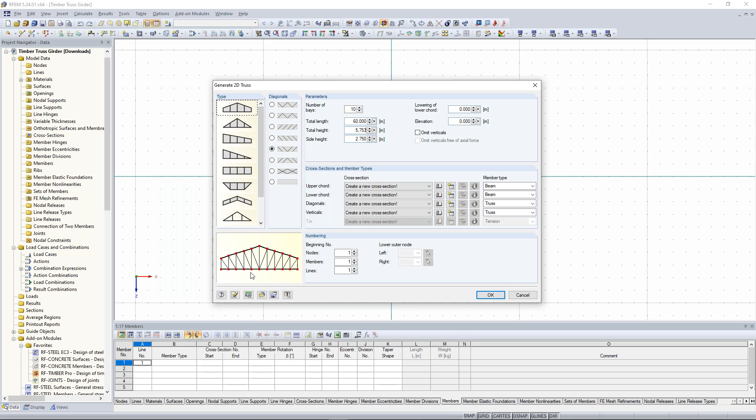My number of bays is 10, and the total length of this girder is 60 meters. The total height at the point here in the middle is 5.75 meters, and the side height, on the left or right side, is 2.75 meters.

Now I have to create new cross sections with the right material, for the upper chord, the lower chord, diagonals and verticals. For the upper chord, I don't know the right pronunciation, sorry for that, I choose a new cross section. I think the right word is chord. Yeah, I guess so. It's chord, okay, thank you.

Thank you, Ayla. So I create a new chord and choose here a rectangular chord because we want to create a timber chord. I click on that icon, and my parameters for the width and height are 220 millimeters and 560 millimeters, so 56 centimeters and 22 centimeters.

Now it's important that we choose the right material. Here you see I just have concrete and steel, but we want to have also a glue-laminated timber. So we have to create a new material, and we create this new material when we click on this material library. I choose timber here, and this mask jumps to the normal timber materials.

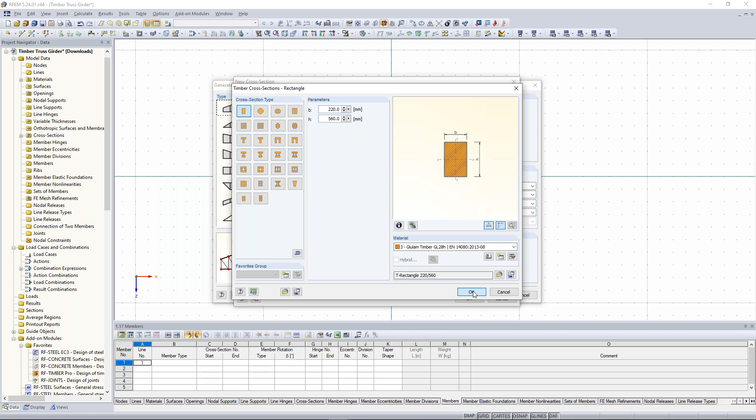Now I can copy here this cross-section description with Control key and pressed C key. Click on OK. And I create a new cross section for the diagonals.

And now I copy here this thing and choose here the right material and change here the cross section to 200 and 200. So we have a quadratical cross section here. Click on OK.

And now the same thing for the verticals. Here we have a cross section of 200 and 180. Also material glue-laminated timber.

So now on the right side, you see the different member types, beam and truss. Where is the difference? Beam can transfer all typical internal forces like bending moment, normal and shear forces, and truss is a member type that has on the end of a member hinges, and therefore you can transfer only normal and shear forces, no bending moments. So keep that in mind.

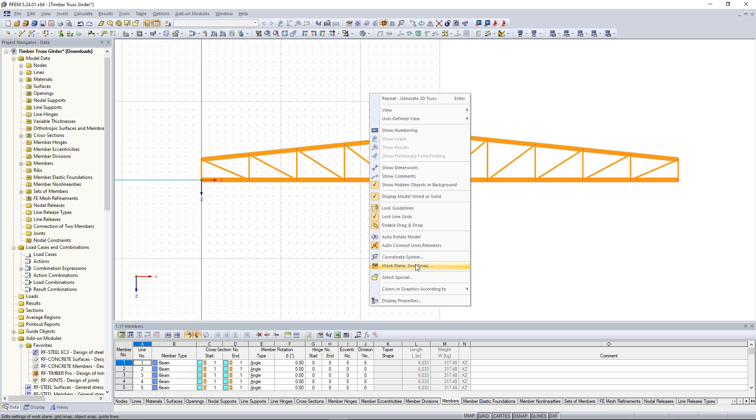So the next step is that I want to adapt my grid to the size of our model. For that I click with the right mouse click, and I can choose here on work plane grid snap. And here I have the possibility to adapt my grid according to size of model.

When I click on that, you will see that the whole grid system adapts to the whole size of my model. And this makes, in my opinion, the overview of the whole model and project a lot easier.

So the next step is that we delete here the left members and the right members, because I want to create here a support, single support. So I draw a selection window from the right to the left side, and the same thing on the right side.

And then I can click here, right click, and say delete. Now these 2 or 4 members were deleted.

And now a very important point, because I want to transfer here also some forces, that we change here these diagonals to the member type beam.

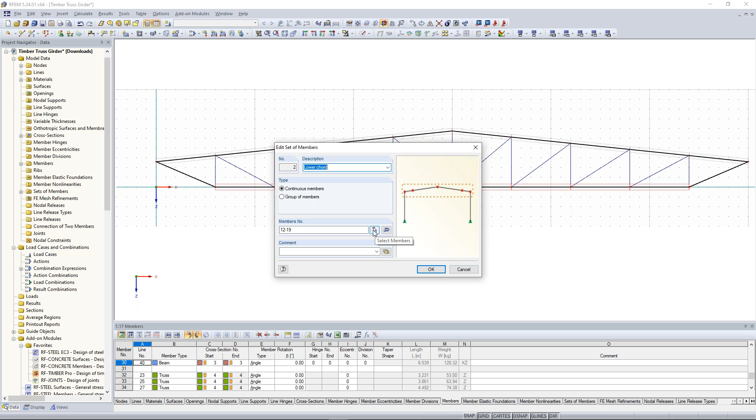For that, I click here on this icon, select members, click on that diagonals or on that members, click on OK. And you will see here this set of member.

So you see this program created automatically this set of members by generating this 2D structure. And this will help us later when we want to add some loads.

Good. The next point is that we add here some single supports. So we select here through this selection window this node, and after that we click here on the symbol bar, new nodal support, and this support should have this type hinged.

And on the right side we have another support, and this should be a support which carries only vertical forces. So I move this with this selection here on UX away, so that we just activate here the vertical forces, similar to this sliding in X direction.

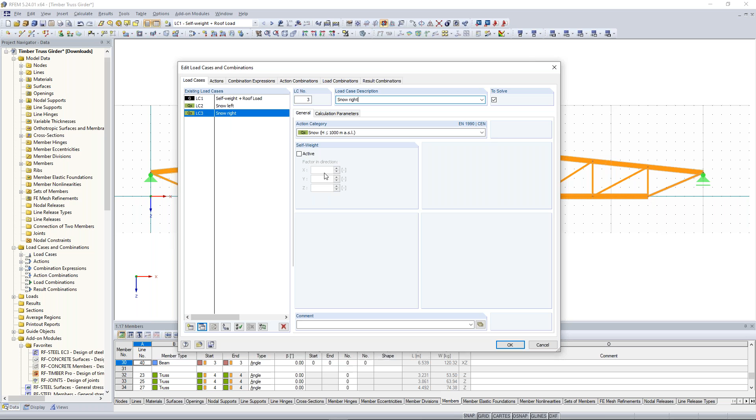And the next load case is snow. I want to consider the snow loads once on the left side and once on the right side. So for that, I click here, I enter left. Then I can easily copy this load case by clicking Copy Selected Load Case and Create New. And here I change the name from left to right. And the last load case is wind suction, because we want to consider also a suction wind load case here on this upper chord.

Important thing is here, because we activated on this basic data at first, that we want to create these load combinations automatically. So several registers open, and we have additional options to do something, like for the snow, for me it's important that the acting of the snow action is simultaneous, meaning both load cases can combine with each other, so no one excludes the other. We will see that later on the load combination. I click OK.

And now I can create here the load cases or the loads. So for that, I click on New Member Load. Now, because we have this set of members, we can refer to them. Just click on Sets of Members, and then the load parameter is 2.5 kilonewton per meter, and I relate to the true member length because we have an inclined member. So for self-weight, it's important to select this option, global related to true member length. I click OK. Now watch, I can just click on this set of members, and the whole load will be created on that upper chord. It's a really big advantage of this set of members when you do that.

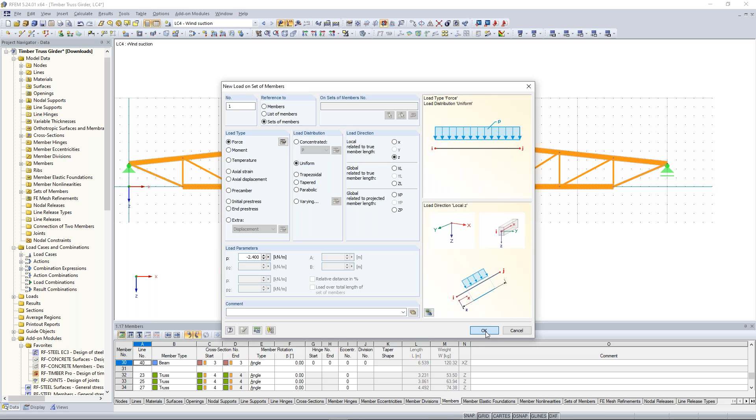Good, next load case, wind suction. So I want to create wind loads. For that, clicking again on Member Load. Again here, I refer to Sets of Members. And now important point, I want to refer to the local related member length, so to the local axis of my members. And because we have suction forces, so suction loads, I have to enter a negative load parameter: minus 2.4 kilonewton per meter. I click on that upper chord and this creation of our loads is done.

When you want to know the local axis of one of these members, no problem. Click with the right click on one of the members, say Local Axis System of Members On, and you will see the local axis coordinate system of the members. Good, I deactivate this again because I know my system.

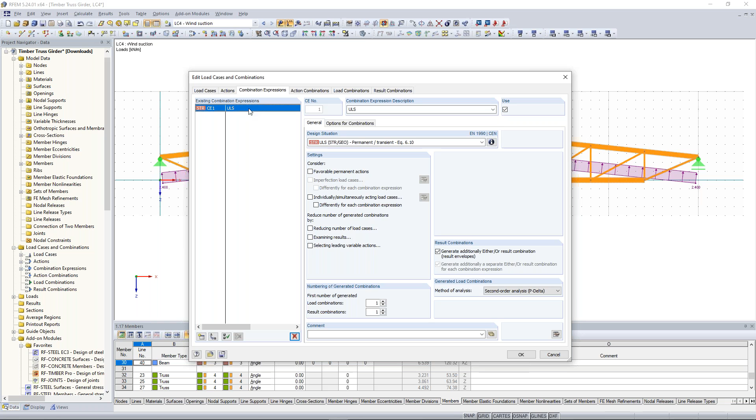And now we can calculate this. Now go to the load cases and combinations again. Click here on Load Cases and Combinations, and look for the combination expressions. Here you see the ultimate limit state and also the serviceability state. For that easy and simple design of this truss structure, I don't need these serviceability expression combinations, so I select them all by holding the Shift key and delete them. I have just interest in this ultimate limit state because in this case it's more important.

I jump to the next register, Action Combinations, and here you can see the different action combinations with the leading load case, by this combination value 1.5, and here also the other leading load case. In this case, here we have the wind load case as the leading load case.

The load combinations we can see here. I think this is pretty clear. As I said before, we have activated in the register actions both load cases of snow, and this means that they can act together.

And this is important to know, because when we activate here at the snow action alternatively, this would mean that both snow load cases would exclude each other. Good, I click on OK.

And now I can say, okay, calculate all, please. And after that, let's watch the results of this girder, this truss girder.

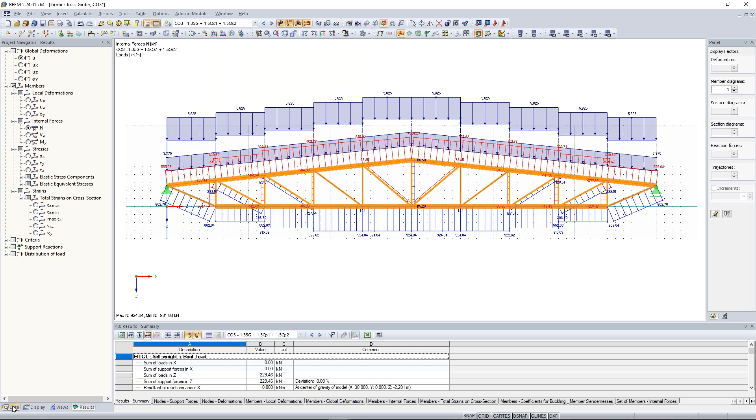Now let's come to the design of this timber structure. For that, I jump to the data navigator, and when you scroll down, you will see here our add-on modules.

These add-on modules enable you to design almost everything according to some standards. So with normal RFEM, you can calculate all structures, but if you want to design something, you have to use our add-on modules. And because we have here a timber structure, I have to use RF Timber Pro.

You will find it here, somewhere there. I can add some add-on modules as a favorite, and they will be here. And now I click here on RF Timber Pro. So this enables the design of timber structures or timber constructions.

And now I have the possibility to choose my members or my sets of members which I want to design. So at first I want to design here my upper chord and my lower chord. So how can I do that?

At first, I don't want to design members. I want to design, as I said before, my set of members. So just select the upper and the lower chord, click on OK, and choose the right standard. In this case, we refer to our Eurocode standard and no German national annex, just the European standard.

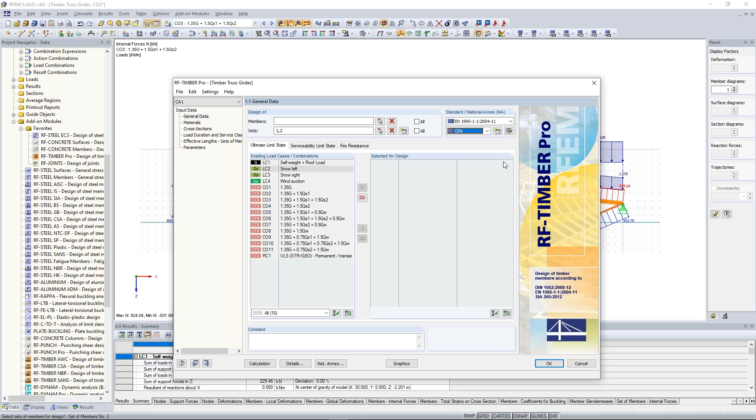If you want to see more details concerning some values here, you can see it by clicking on that icon, and here you have some additional information on how they calculate some limits and some designs.

Good. Now important, I have to select the right combinations or result combinations for my design. I decide here to design my load combinations. I choose here every load combination and transfer it to the right side. Select it for design. I just design here for the ultimate limit state. We don't need any serviceability limit state.

Good. Now jump to the next window, and here we see the material timber for the design. Here we can see some material properties, characteristic strength for bending, for example, or for tension, compression, and so on.

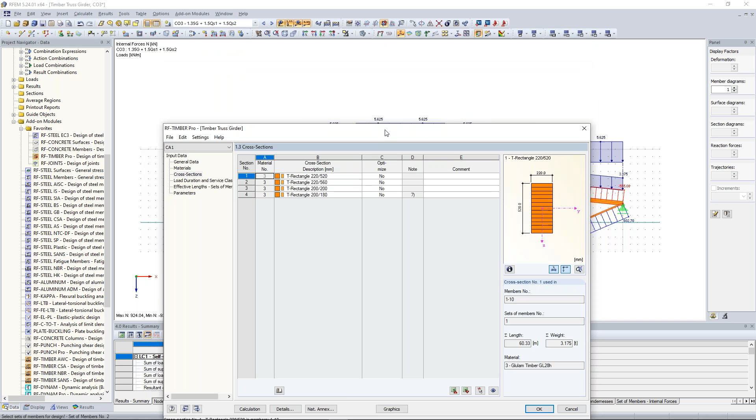Let's jump to the cross sections. Here we can see some cross sections which will be used for the design. And here, additional note, no member with this cross section is selected for design, because we just design here the upper and the lower chord, and the verticals aren't selected for that design, because we can create here several cases for our design afterward, but we do that later.

Now, important point, load duration and service class, especially for the timber design. Self-weight and roof load is permanent, and our snow load cases are short-term, so the load duration class is important for the timber design. And here we have also this service class. I decide here for service class 2, and so we have here some additional information for service class 2.

And now I go to the next window, effective lengths. This is very important when I want to do some stability design.

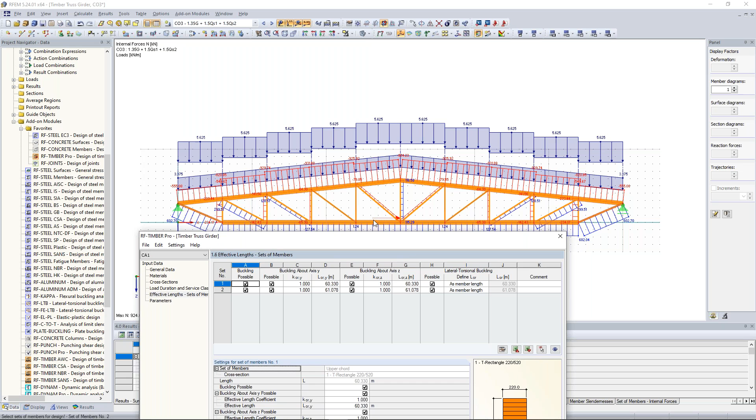I assume that my upper chord is fixed enough due to additional members out of the plane. So I assume that this is fixed enough, and I say that no buckling is possible for the upper chord.

And for the lower chord, we have just tension forces, so no stability check will be necessary because we have to consider stability only if we have compression forces, and the only compression forces you will see here in this upper chord. So for tension forces, we don't need to consider buckling or torsional buckling, so I don't select anything here.

I can do the same thing when I click here on details. When I jump to the stability register, I can say, okay, please don't consider any stability, because I know my upper and lower chord are fixed enough, so stability wouldn't be important here. Same solution.

Parameters, I can add additional parameters here, but in this case this isn't so important. So how can I calculate this?

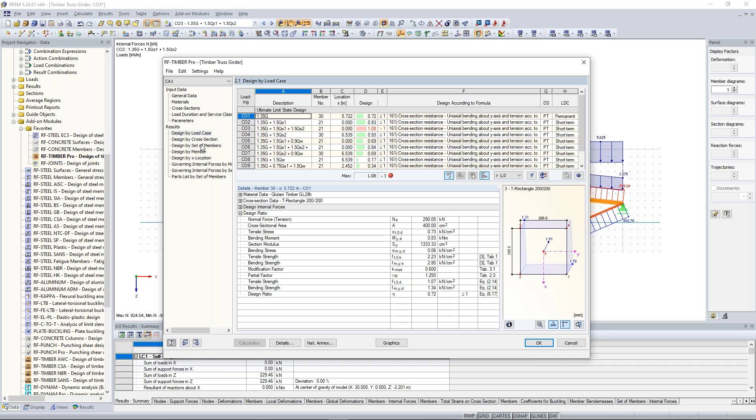Now you can see two different windows. First of all, here at the results, these results are listed in different categories: design by load case, cross-section, set of members, and so on. I choose here by cross-section, and almost everything is fine, except here this rectangle 200 by 200.

I'm pretty sure that this is this diagonal here on the left or right side, so I can filter them a little bit better. I click here on this rectangle and I can see, okay, this diagonal is not good because our cross-section resistance, our design, is over 1.

And when I click here on this rectangle, I can see the design ratio, and this design ratio is more than 1. Here I can see the whole way of the calculation of this design.

And what can I do? I'm pretty sure that we have to increase this cross section. How can we do that? Just go here to cross section and activate optimize, and click here on yes.

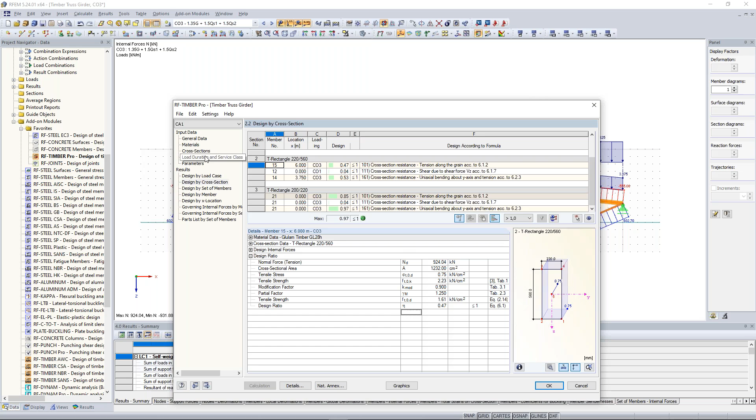Good. Now it's important that you also transfer this new cross section, to export it to RFEM. Export cross section to RFEM. Click yes, because now it's important to calculate the whole structure in RFEM again, since we have new stiffness in that case. So calculate everything again.

Okay, now let's go to the results of our add-on module, RF Timber Pro. And here we can see the max design ratio is 0.97. This is very good. Good.

Now I want to design the verticals, and after that the diagonals. So I click here on new case, and the description of the new case is the verticals, because now I want to design the verticals. Click on OK.

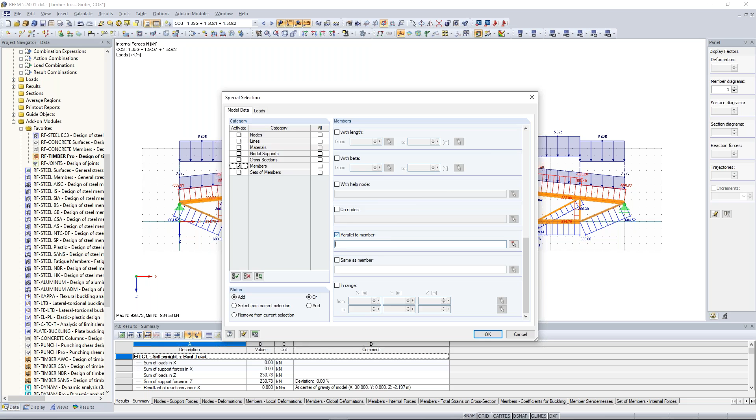And now I activate this member, scroll down and say okay, parallel to member. Now I choose this one member, click OK, and you will see all members are selected parallel to that first member. I click OK, and these selected members were transferred here to that part. So again, I choose here my load cases for the design.

I go to materials, I think this is now pretty clear, cross sections and so on, effective lengths. Oh sorry, here I have to select the service class 2. And now, important here, we can get some pressure forces.

When you watch here, we have a vertical with some compression forces, and here I want to consider the stability design. Because I have here the normal buckling, once out of plane and once in plane, so the normal Euler case 2, I say okay, my buckling length should be the same as the member length, also for the lateral torsional buckling.

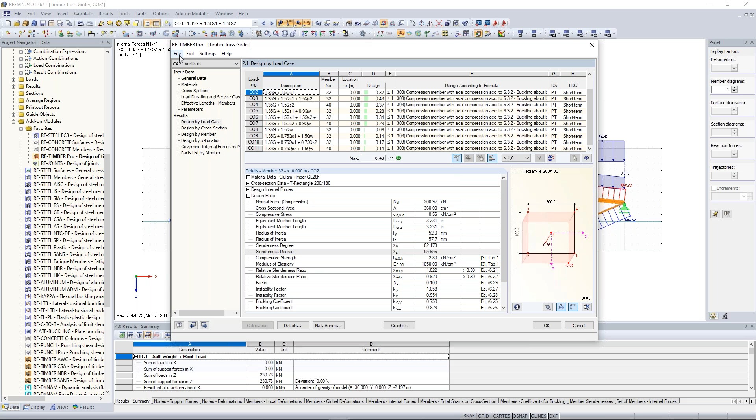Now the last case is the design of the diagonals. So new case, diagonals, click on OK. And again, I choose here the right members for the design, and I want to design here this member, the diagonals. Now it's, as you can see, a little bit hard to select them because clicking at the same time is a little bit hard, so I use here my view navigator.

I want to display them by different cross-section types, so members by cross-section. And now I decide here for the T rectangle, 200 by 220, and I choose here these members. Click on OK.

The members on the left and on the right side I don't want to consider because I have already considered them in the design of the lower and upper chord. So in the first case of this design, click on OK.

Choose here the right load cases for the design. Jump to the next window, materials, I think here is pretty everything clear. Cross section, also here is everything correct. Load duration class, yeah, the same things here again. Maybe the service class, change here to 2.

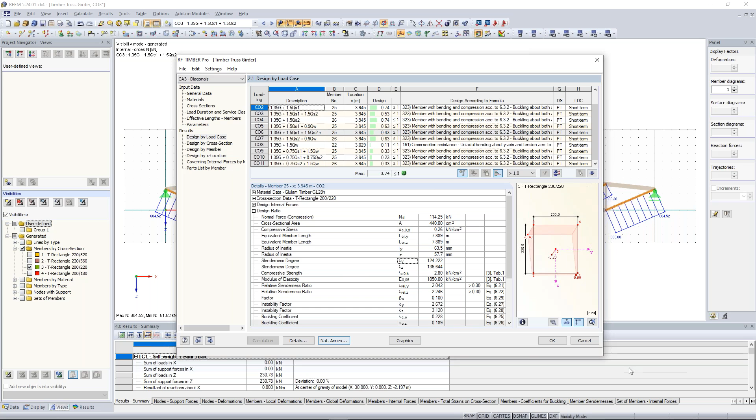We can also watch the different design ratios graphically. So I click here to RF-Timber, and here we can see the different design ratios. And yeah, as we supposed correctly, this diagonal here on the left and here on the right side has a very high design ratio in comparison to this normal lower chord.

But I think that's pretty clear because here we have a smaller cross section, like here on this upper chord. Jump to the next design case, so the verticals, and here the diagonals. Yeah, this was the design of this timber truss structure.

Good, Ayla, any questions or anything to show? What would be good? No, I think everything is fine and nothing special.

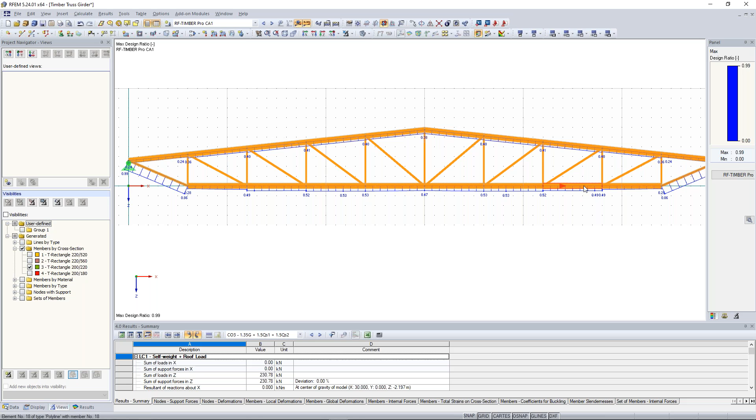You can optimize here the cross sections. So when I jump to the first case, you can say okay, maybe I can optimize here this upper chord. So I can say yes, I just want to optimize the height, the width should be the same. I start with the height of 220 and the maximum should be 500 and the increment 20 millimeters.

And the same thing I can do for the lower chord. Here also just the optimization of the height. Increment 20 millimeters, important for the production of this cross sections in the factory. I say okay, calculation.

Okay, now you see here the design ratio 0.99. And when I jump to the cross sections, I can see okay, here cross sections by the design of timber structures, 220 and 300. But consider, when you calculate this again, you will get more deformation, and we didn't make any proof of the deformation, yeah, just the ultimate limit state.

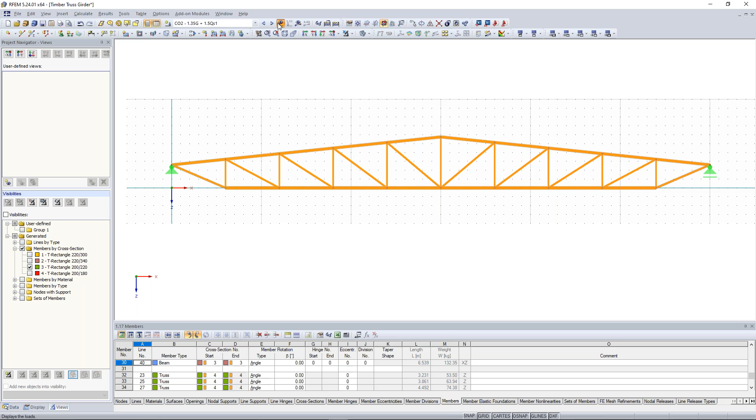Pretty sure higher deformation. Yeah, let's look at the deformation, maybe on that load case. What's that? Maybe this would be more interesting when you have just vertical loads.

And I remember that we have a deformation of 180 millimeters. And now we will get deformations of 260 millimeters, so 8 centimeters more. I don't know, this is also something you have to consider in your design.

Good. Anything else, Ayla? Not yet, no.

Okay, we have one new question. Is it possible to have multiple sections for each member? Yeah, that's possible, but you have to create more cross sections for different members and put them into the design.

So I can, but we almost did here the same thing. We designed here for that upper chord a different cross section, for the lower chord a different cross section, for the verticals and diagonals. Maybe you can optimize your construction, because here you will get more tension forces. So you can say, okay, the first 2 rows of this diagonal can be a different cross section and put them into the design.

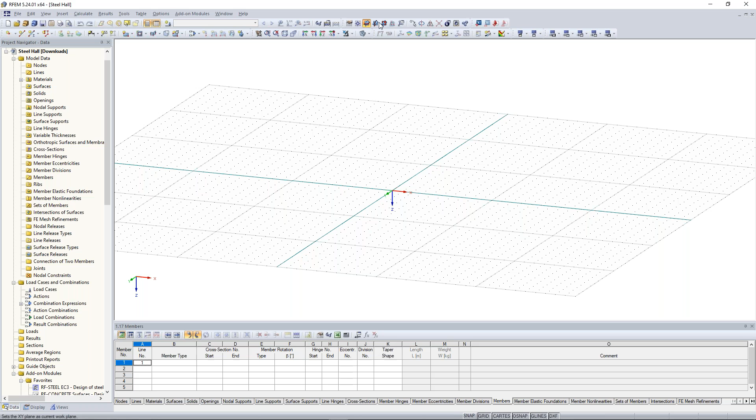So again, here we have the model type 3D. In that symbol bar you can see here 3 different work planes. Now I click here on the work plane XZ because first of all I want to create a 2D truss structure. Again, as before, click here on the menu bar, Tools, and go to Generate Models, Members, and click on 2D Truss.

Yeah, now we have to create new cross sections, but I think at the moment this is known how this works. So I create new cross sections. The upper chord has a cross section of HEA 300. So here, click here, Import Rolled Cross Sections, HEA 300.

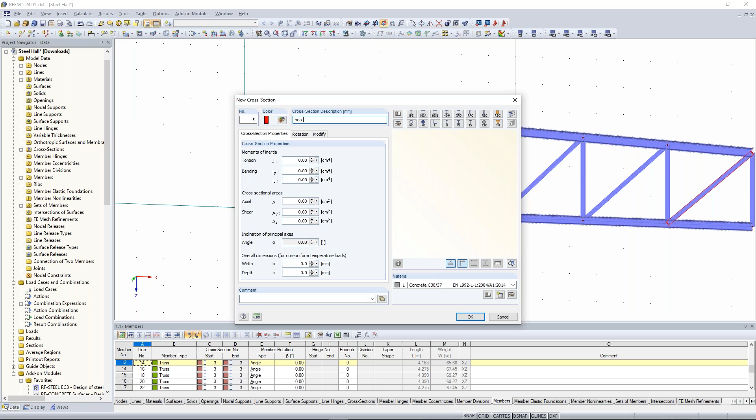And the next part is that I change these outer diagonals, because I'm pretty sure that they will get more internal forces, especially normal forces. Therefore, I change here the cross section. I select them, double click on one of them, and I change the cross section. Here I change the cross section to HEA 140. I choose here the right material and click on OK.

Good. So now we have different types of cross sections. We can display them a little bit nicer. I can show you how it works. When you go to the Display Navigator and scroll down, now you have the possibility that you can color the graphics according to the cross section.

And here we can see the different cross sections by different colors. If you want to change maybe one color, no problem. Click here on the right side on this panel. By double clicking one of these cross sections, you can easily change the color of one of them. So if you don't like this blue color, you like, for example, this violet, just here this one, you can change it. Yeah, good. Or blue, I think that's more blue than violet.

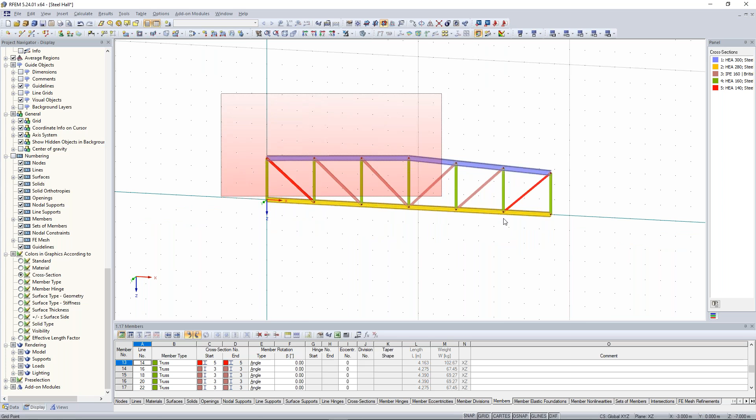Good. So next step is moving this truss 8 meters along the z-axis upwards. So select everything, right click, click here, move or copy. I just want to move it 8 meters high, so I don't have to enter here the number of copies. Displacement vector, remember our global z-axis is downwards, so when I want to move it upwards, I have to enter a negative value, -8.

So, the next part is that I delete here this outer vertical because I want to connect here a concrete column. So I delete here this outer member. Now I create a new column.

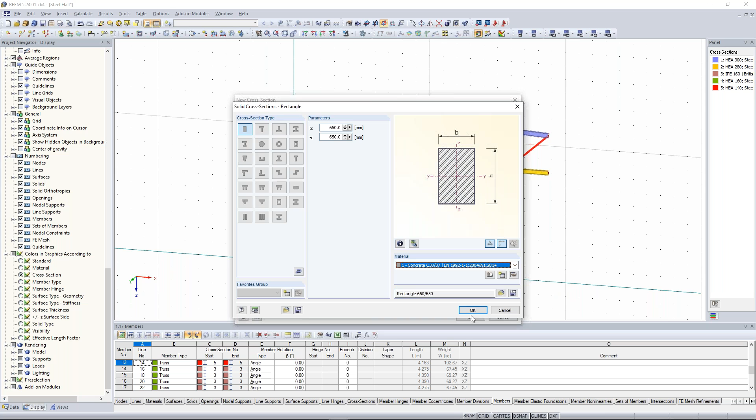For that, I click here on the symbol bar, new single member. I create a new cross section, rectangle and quadratical cross section, concrete C30/37 according to the Eurocode. I click on OK. Again on OK.

And I start from the bottom to this corner node of this truss structure. Now you can see I can't snap here these grid points because I didn't activate this here. Here on this status bar, you can activate snap to grid. Now it's activated and I can snap here these grid points. Good.

Now I copy it easily by drag and drop by pressing the Control key on my keyboard. And because they have, in this case, the same colors, I change here the color of my concrete structure to pink. So, nice. Good.

The next part is that I adjust here some hinges. We offer two ways of inserting hinges. The first thing is, maybe this is also not so known, that we can add hinges graphically. Therefore, go to the menu bar, insert, model data, and then go to member hinge, and then assign to members graphically.

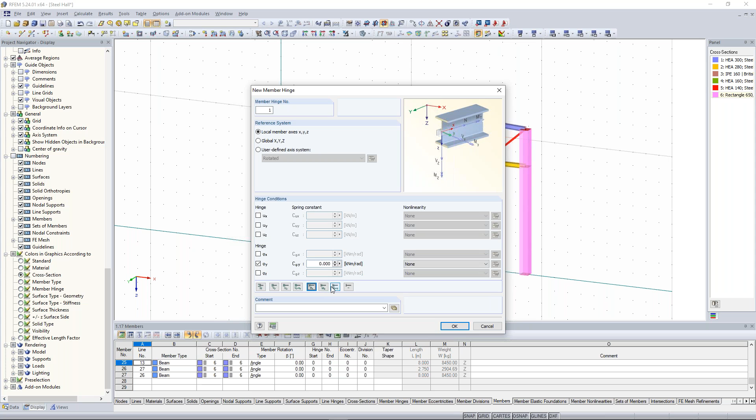As you can see here, I want to connect this upper chord by a moment hinge here on that concrete column. Therefore, I create a new hinge type and I activate here the moment hinges. I can also do it here by clicking on one of these icons, set rotational release MY and MZ. Yeah, it's the same solution. I click on OK.

And now you will see here blue nodes or circles. When I click in the middle of one of these members, the hinge will be created on both ends. And when I just click on one of this member's ends, it will create this member hinge just at the end of this member. Yeah, I do it here on the left side and once on the right side. Click on OK. I change here the display model to the wireframe model, and you will see the hinges a little bit better. And the same thing we do for the upper chord.

The other way of setting member hinges is just click here by double click on one of the members and adjust here the member hinge. And here in this case, I want to create a member hinge which has moment hinges, but also a shear and normal hinge, because I want to transfer all these forces via this diagonal. So I create a new hinge.

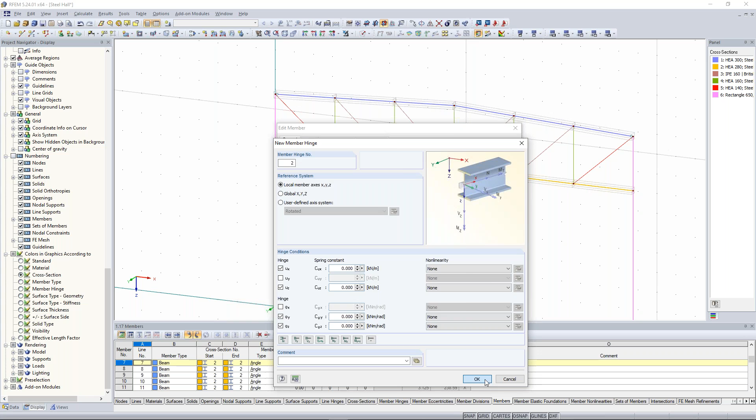And after the calculation, we can see that the tension forces in that upper chord are transferred to that diagonal into that column. Because when we have here tension forces, this tension force will go along this diagonal and will transfer this tension force as a compression force to this concrete column. I think that's pretty clear.

Then the right member, and here the same hinge, but at the end. Good. Yeah.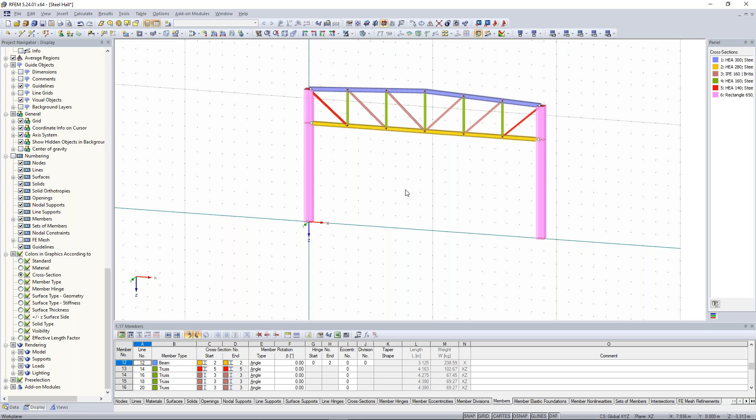The next part is that we check the self-weight of the structure and watch the internal forces, to see if this frame is modeled correctly. So for that, I choose here also the lower nodes because we want to create now some supports. We have a rigid support here, so this enables me the activation of all moments and vertical and horizontal reaction forces.

Now I create here a new load case. Self-weight, and just I activate here the self-weight, click on OK. And now I want to see the results.

Okay, I think the deformation - here we see at first the deformation, but for me more important, the internal forces, if we modeled and entered the hinges correctly. So for that, I activate here the internal forces. And yeah, here we can see it.

Tension forces, because we have positive normal forces. Compression forces, yeah, simple truss structure. I think that's pretty clear. And here we can also see that this tension force is transported to that diagonal into that concrete column.

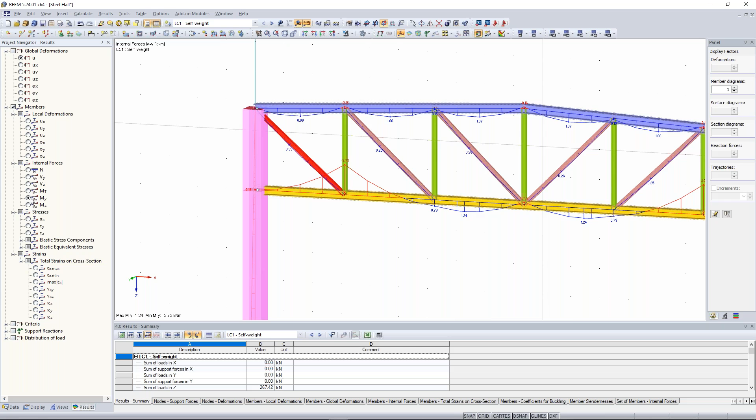And now let's watch the shear forces. And here we can see at this hinge we have no additional tension forces, no normal forces. The same with the shear forces, you can see 0. And bending moments, again here the same, 0 bending moment. On the right side the same. Good, so I think we modeled it correctly. So let's continue with the other frames.

Again, I want to adapt my work plane according to the size of my model.

Now I want to copy it 2 times in the global Y direction. So I select everything, right click, move and copy. Number of copies is set to 2, and my displacement vector is in the global Y direction, 9.5 meters.

Good, I change here to the work plane XY. And now I want to add here additional beams.

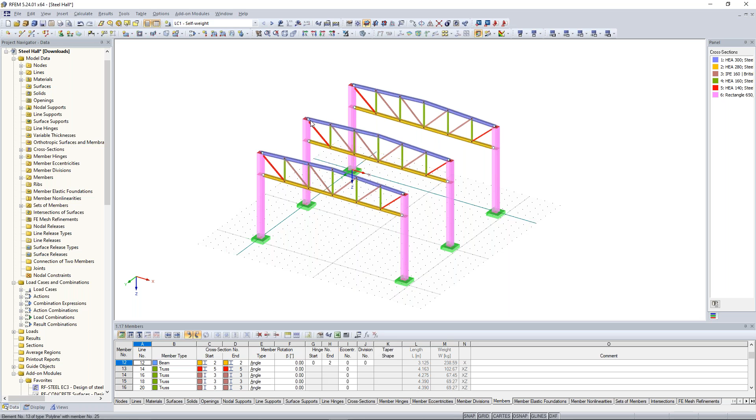Let's do that - new single member. And they get a new cross section, HEA 240. Material steel.

And now I want to add here some hinges on both ends, so they will be connected as hinged beam, as truss we can say, because we have on both ends hinges, moment hinges. Okay, so let's do that.

So, good. And the other nodes, they will get also new beams.

For that, we create a new hinge. The member start should have here also at the start a new moment hinge, and at the end we can leave it as none, because here we do another member hinge.

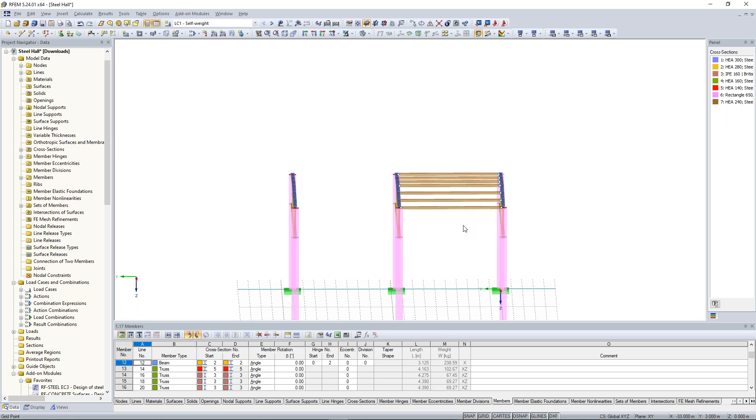Now I want to copy that beams. I press my control key on my keyboard, select everything, and by drag and drop I can easily copy it.

Good, now I want to create here at that beams scissor hinges. What are scissor hinges? Scissor hinges - when you have four members connected, like here for example. Here, 1, 2, 3, 4 members connected in one node.

I can consider scissor hinges, and each of the two member pairs transfer moments in its continuous member direction, but they do not transfer any moments to the other pair. So only shear forces I want to transfer to that beam.

So when this continuous beam gets some loads, yeah, it will have a distribution of a moment, something like that. So a support moment and a field moment, and I want to transfer only shear forces to that beam, to that upper chord. I have to create scissor hinges.

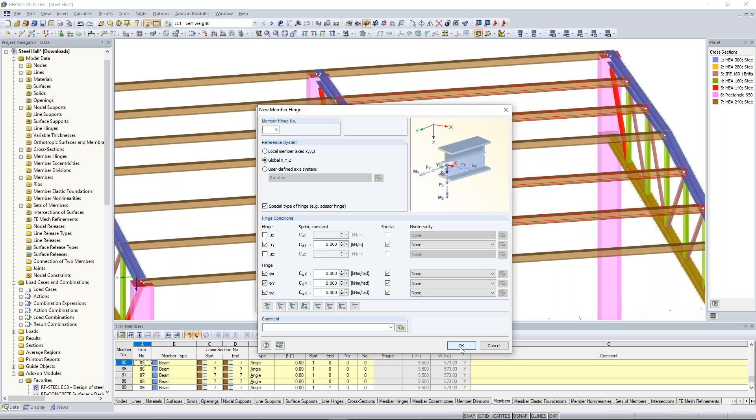I have to activate here the scissor hinge, and also one torsional hinge, because I don't want to have any torsional moments in my beams. I click on OK, and you will see here this S for scissor hinge, and we will do the same also for the other side.

But here, member start, I choose here the global. So here we have this member scissor hinges.

And for the end of this beams, we create also a new type of cross sections of member hinges. Right click, member, edit, and here we create for the end these kind of hinges, in order not to get any additional forces or moments.

Good. Okay, so let's calculate this thing maybe in order to see if we modeled everything correctly.

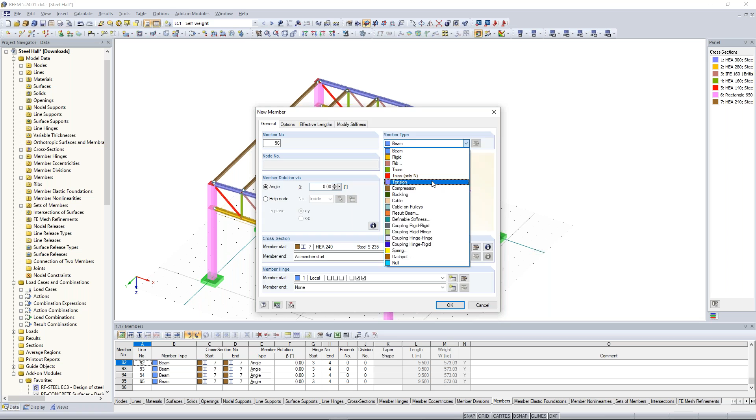I choose here a round cross section of the diameter of 20 millimeters. Click on OK. And create here this truss beams. So good.

So now let's calculate this thing. So it takes some time. And let's look to the internal forces. Maybe according to the internal forces, I can explain the scissor hinges again.

So I choose here these 4 members, and I want to explain you the scissor hinge again. So as you can see here, we have our continuous beam, and here we have also a beam. And what I have done with the scissor hinge, I said okay, please create me a scissor hinge that I transfer only my shear forces, so my vertical forces, to that beam in this direction, to the blue beam.

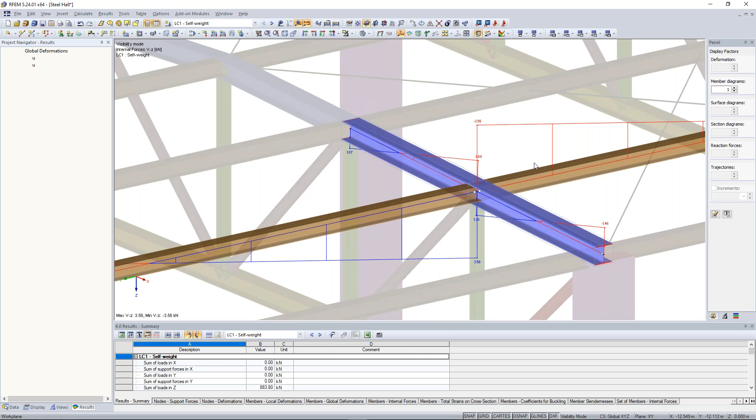And everything else, this should be considered in that continuous beam. And you can see no moment was transferred to the other beam. When we look to the shear forces, maybe here we can see, okay, here we have additional shear forces from that continuous beam. Yeah, and this is something important to know for the scissor hinges.

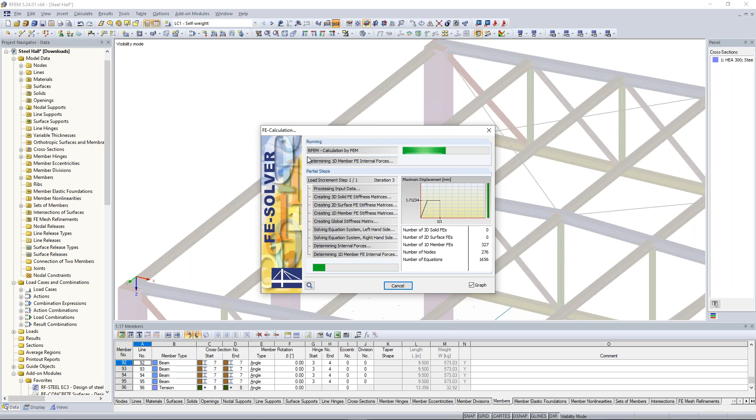When we change the calculation parameters, the number of divisions of members for the result diagrams, maybe to 30, we will get the right distribution. Let's calculate this again. Now you see the right distribution of the moment. So when you think the distribution of one of your systems isn't correct because it has the wrong distribution, check the calculation parameters for the right number of divisions of members for the result diagram.

Before coming to the load cases and loads, I forgot to mention that in the calculation parameters you have the possibility to check the deformation of failing members, especially when you have nonlinear member types. We have nonlinear member types here because we have tension member types for the bracings. You can handle them so that when they fail, they are removed individually during the successive iterations. This is an important point when you have systems or models with some instabilities. You can check that additional option and activate it, and maybe your model will calculate then.

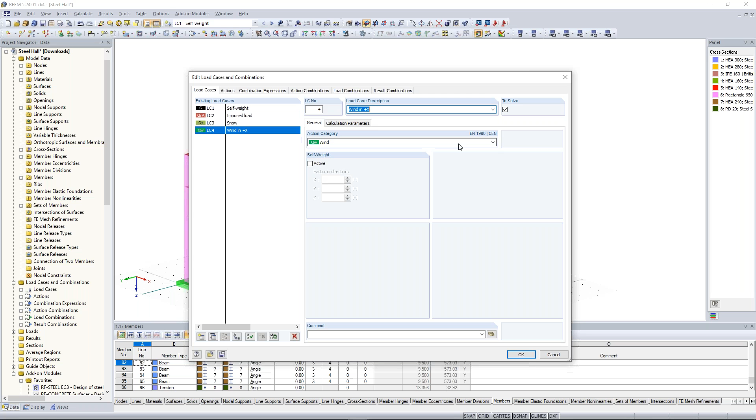Again, let's take a look at the actions: imposed, snow, and other things, combination expressions. I just want to consider the ultimate limit state here, so I remove the serviceability action combinations and load combinations. This will be done automatically because we set them before in the basic data of our model. Click on OK.

Now we add the loads on our structure. I choose the right load case, and I want to add some loads on that roof plane. For that, I go to Tools, Generate Loads from Area Loads on Members via Plane. First of all, I relate to my true area because I have the self-weight. The magnitude is 0.5 kilonewton per square meter, and now I choose the corner nodes so that I can get the boundary of my area load plane. Click on OK.

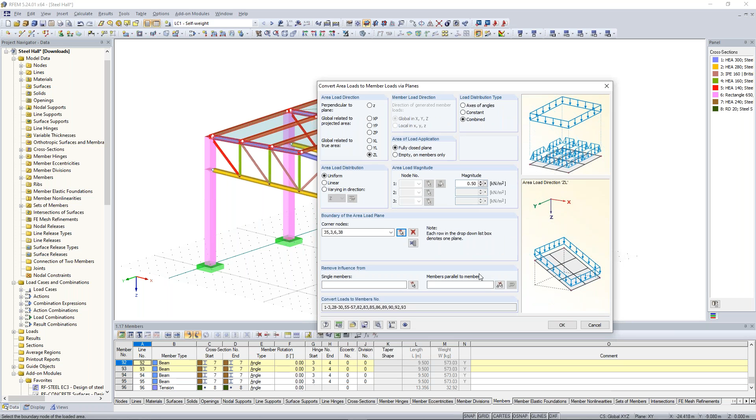Now I can remove the influence of members. As you can see on the work plane, everything is selected at that moment, including the upper chord, but I just want to consider the loads on these beams here, the continuous beams, not the upper chord. So I say remove the influence from members parallel to the upper chord. You will see now just these members are selected. Click on OK, and let's do the same thing for the right side.

So again, click on Tools, Generate Loads, and here we can see the program uses the corner nodes from the last time. So if you create the new plane again, it has the same corner nodes, and you have to delete these nodes. I click delete current area plane, then select the new corners. Click on OK, and now we say again parallel to this upper chord, and click on OK.

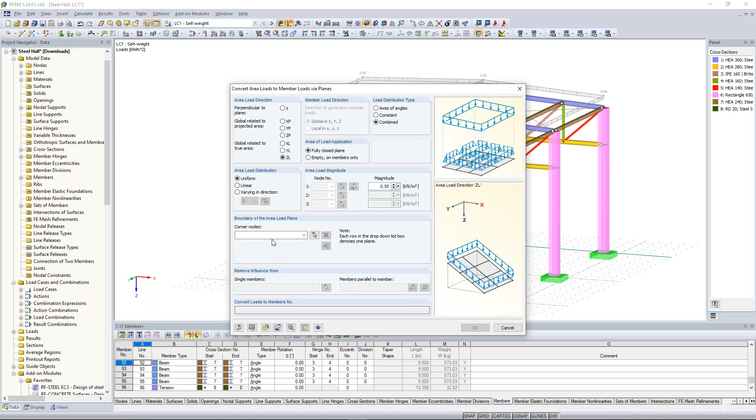Now let's do this also for that plane: Generate loads from area via plane. Here we have the same magnitude. I choose the right nodes, and click on OK. As we can see, here we have an information box about the generation of the loads. Click on OK. When we right-click on display separately, we can see how the loads were added on our members.

Now jump to the next load case, imposed loads. Click on generate loads again. Now it's our big advantage that RFEM remembered our last input of corner nodes, so I can say please add the same magnitude here. Click OK. And we have the same input for our load case imposed loads.

Good, next load case, the snow load. Here I choose tools, generate loads, not area loads on members via plane this time, but we have the possibility of snow loads on a dual pitch roof.

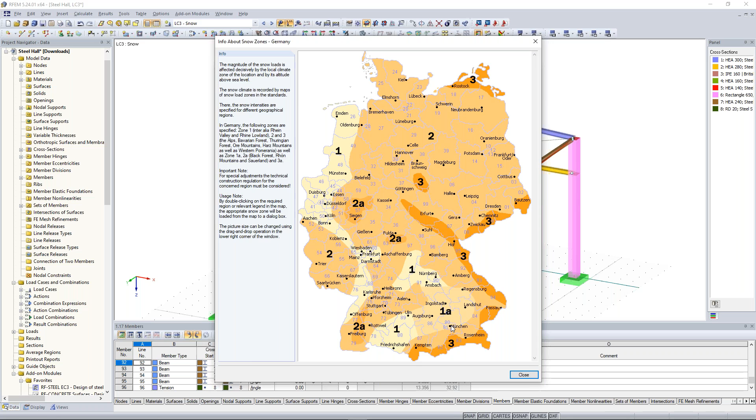Here I choose the zone number, so first I have to choose the right national annex. I decide for Germany because we are located in Germany. I choose the right information zone, in this case Munich. I double click. The altitude is set to 540 meters, and now it's important to choose the roof geometry correctly.

So in the right order, you see A, B, C, D, and so on. Clicking in the right order, C, D, E, F. Here we can see the new load case which will be generated. I want to remove some influence because I just want to have my snow loads on those beams, members parallel to that upper chord, and click OK.

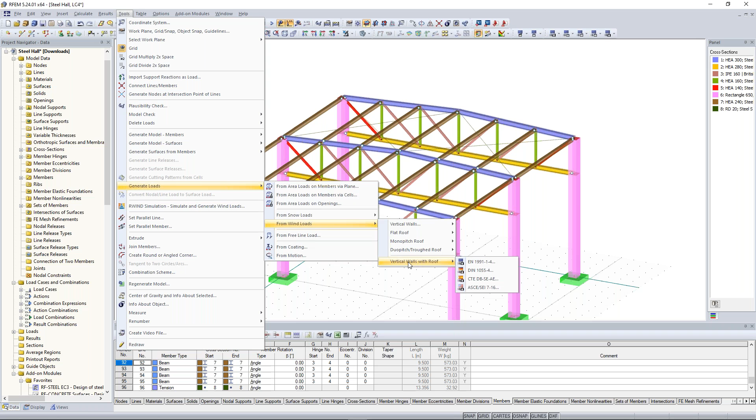Good, now let's do the same thing for the wind loads. Jump to the next load case, wind in positive X direction. Click on Tools, Generate Loads, Wind Loads. Here we have the possibility to generate wind loads on vertical walls with roof. I decide according to the Eurocode, and again for the national annex we have the possibility to consider other national annexes.

Wind zone, I choose Munich, category 2, because I have maybe a little bit higher buildings in a bigger city. Again here I choose the right base geometry. Now it's important that you do the base geometry in the right order as the roof type and geometry. Start here again on the left lower corner, and when you want to select the roof type, you have to start at the same left lower corner, as you can see in the right bitmap.

Let's do this, and here the same. And because we have a very flat roof, the program will say it will consider it as a flat roof for the wind pressures. So now we have the wind load case, wind in the positive X direction.

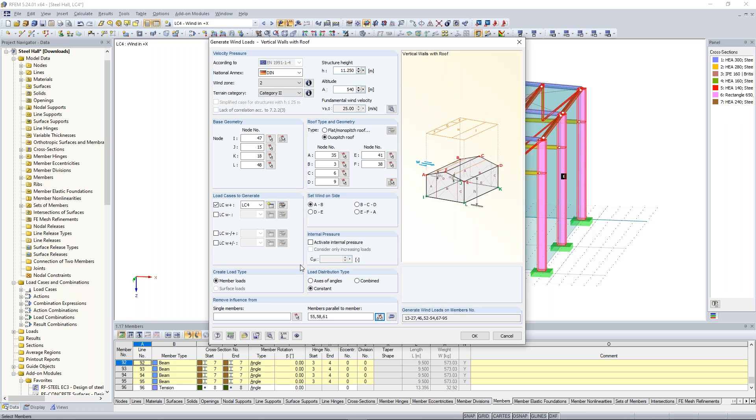And the rest I do it manually, just by the selection of this truss girder here. Click OK, then click OK again.

Now let's see the different information about the wind loads. Here we can see the different wind loads on each member. I think that's pretty clear. Now we want to consider these wind loads also in the other directions, and because we've already generated these loads, we can easily copy this information to the next load cases.

Let's go to edit cases and combinations in the symbol bar, click on load case 4, wind in positive X, and now we can easily copy it three times, because we want to consider the wind loads in every direction: wind in -X, wind in positive Y direction, and in negative Y. Click OK.

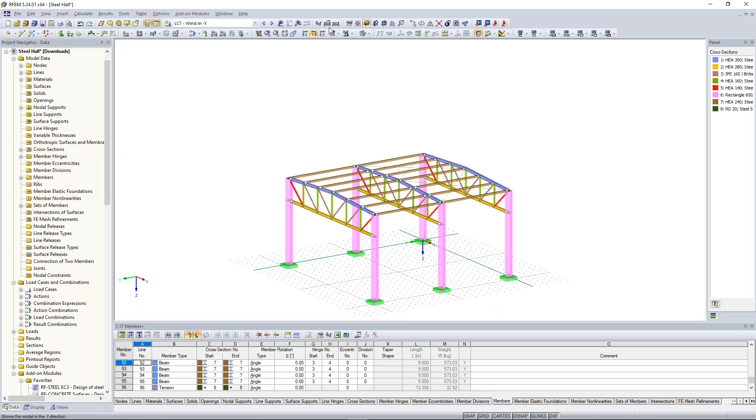Okay, let's calculate that again. This will take some time.

Sorry for the delay, but my PC is slow today, I don't know why. Now it was calculated correctly. The reason was because I had the wrong member hinges here. Sorry for that, but now I think everything is correct.

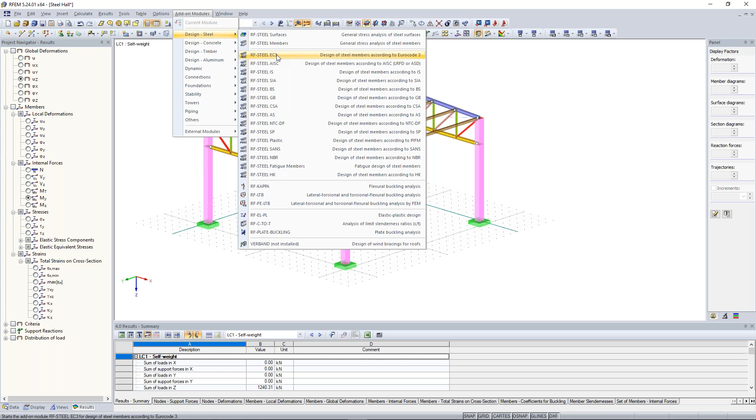So let's do the steel design. For the steel design, we can use our add-on module RF Steel Eurocode 3. Let's open our add-on modules, design steel, and here we find RF Steel EC3, Eurocode. Here we can design steel members according to the Eurocode 3. Let's click on that.

Similar to our further add-on module RF Timber Pro, we can design different members and sets of members. First of all, I want to design all steel cross-sections, but just a design of cross-sections, no stability design. So I choose here all members, but all steel members.

So I go to the view navigator, click here on members by material, and activate just the steel material. Now I draw a selection window, click on OK, and I refer to the normal Eurocode.

When you want to see some more information about some values, you can click here on this button, and you will get some more information about different types of proofs, like the general method when you want to make a stability design, or serviceability when you want to prove the deflections, and so on. The partial factors, good.

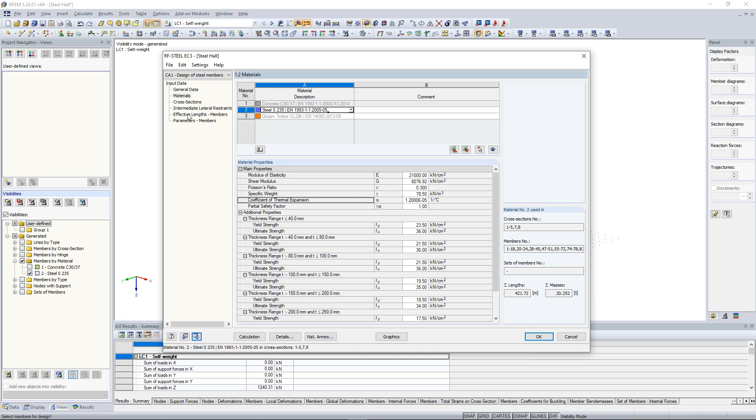Now I jump to the next material. Here we can see different material properties, cross sections, and so on. And also here some intermediate lateral restraints.

So when you have some additional members who fix maybe some beams, you can add some lateral restraints here. Also important for the stability design: effective lengths - you can set the correct buckling lengths, and also the right lateral torsional, difficult word, lengths for that.

But as I said before, for that case, we want to do only a cross-section design, not stability. We can rename here this case, so just design of cross sections.

And let's go to the details and deactivate here the stability analysis. Click on OK, and now watch these two windows on the left side - they will disappear because now we are just focusing on the cross-section design.

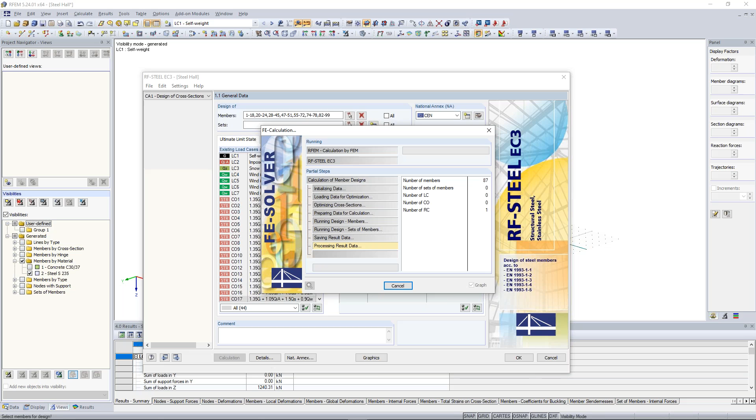I click here on calculation, and all members will be designed. And we can see here, okay, everything is good, so the cross sections are good enough.

Good, and now the next check is the stability analysis. And for that, we have to create a new case.

Now I have a small problem, sorry for that. Now I want to go back to my add-on module RF Steel. And now I want to do a stability analysis of my upper chord of my truss girder structure here.

So I create a new case: stability analysis of upper chord.

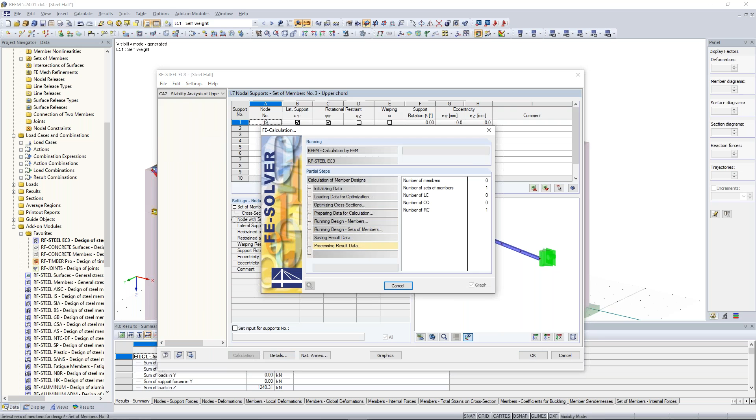Now we can see this is not possible, non-designable. When you look at the design, this design is not good enough because we forgot to add an additional support at the middle of our upper chord.

So we have to add an additional support for our proof of stability, and now I have to wait for my program again because it is loading. Now I want to add here in the middle of this upper chord of this set of member an additional support. For that, I click here on that node, choose it from the model, and say OK, let's do here an additional support, but I don't want to activate any rotational restraint, just a horizontal support, so a lateral support. I calculate it again.

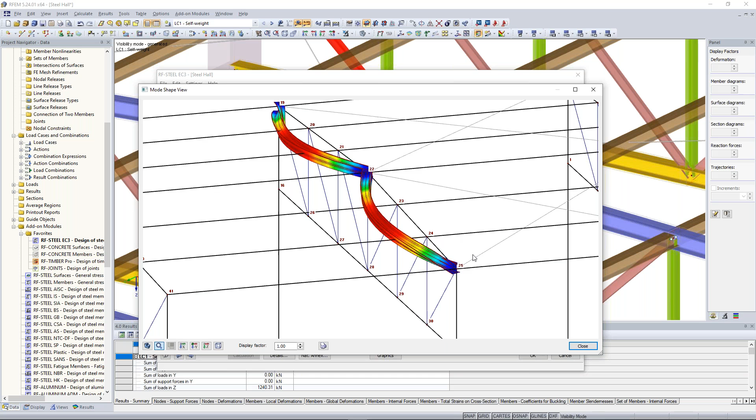So here we can see the eigenform. Here we activated the supports, as you can see. Here just the lateral support, so just horizontal support, and here also the fixed support. This is very interesting to see how this will deform.

Okay, this was the design, the very easy design of this steel hall. So what we have done, we did a cross-section design and then a stability analysis of our upper chord.

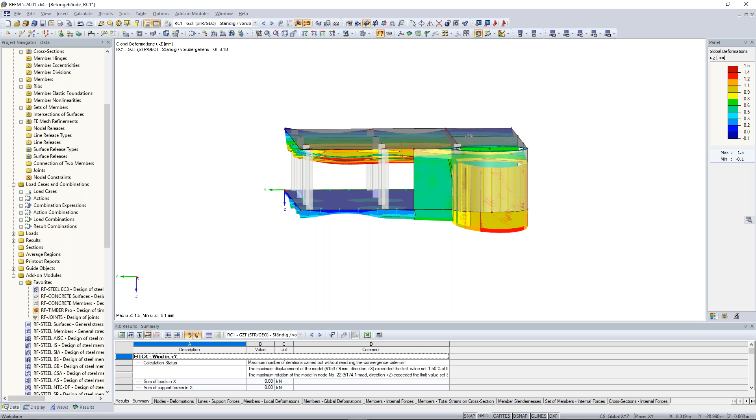Maybe you can remember, this was the model we modeled together in the second part of our online training for students. Now we do the design of these concrete surfaces, of these columns, and also of this downstand beam here. Good, so let's do this for our slabs.

For that, we can use our add-on module RF Concrete Surfaces, for the design of concrete surfaces. You will find these add-on modules also here on the menu bar, under Design Concrete, RF Concrete Surfaces. Let's click on that.

So what we can see here in this window, we select first of all the result combination, and then the right standard. We want to design here for the ultimate limit state according to the Eurocode, so no German national annex. For more information, you can edit parameters here, but I think the presettings are pretty good for this first proof of concrete surfaces.

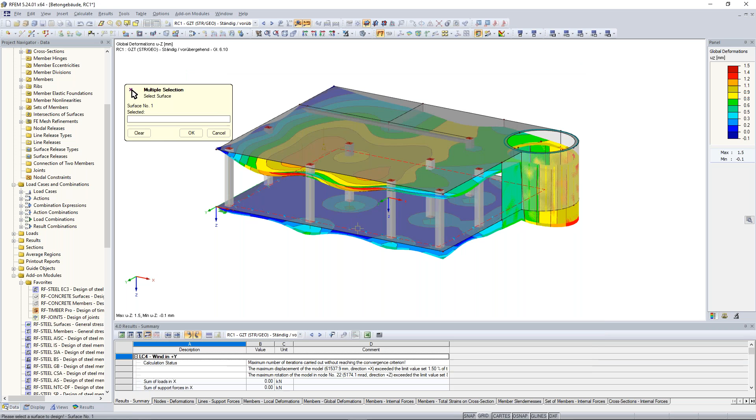And now let's jump to the reinforcement. This reinforcement window contains 5 tabs that control the reinforcement parameters. We define 2 reinforcement groups. The first reinforcement group will be slabs. Therefore, we choose the right surfaces, the bottom plate and also the upper slab.

And the next part is here, reinforcement ratios. I think the presets are pretty good, so you don't have to modify anything there.

Reinforcement layout - here you can adjust some additional things. For example, the concrete cover for reinforcement, you can do that according to a standard. When you click here on edit, you see this exposure class according to the standard.

But because we're doing a very easy design here, I don't need to consider this, so I leave the values here at the default. I think that's pretty clear.

Here are the reinforcement directions - once in the horizontal direction, then the other in the vertical direction. I think that's pretty clear. When you have different geometries of slabs, you can adjust the directions here.

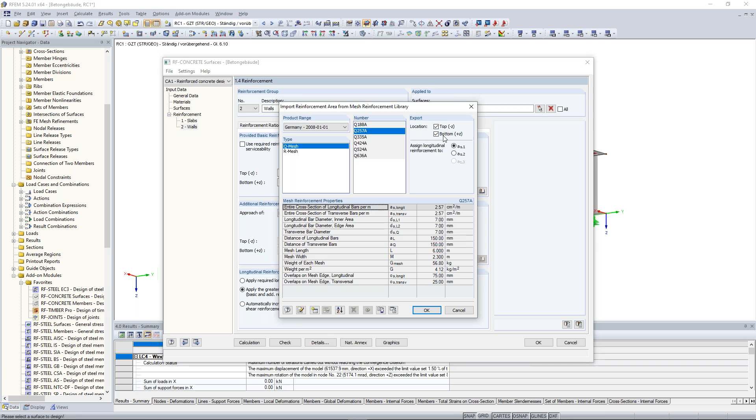And for that case, I choose one of our meshes. I choose here the Q257A, both locations.

Now I can jump to the last two registers. You can set some minimum reinforcement due to the Eurocode or your standard, also the design method, and so on. There are a lot of options you can consider for your design, for your proof of these concrete structures.

More you can find here in the handbook. When you press F1 or click here on the left corner side on help, it will open this handbook, and you can find a lot of additional information about this add-on module, also something about the theory. When I go here you'll find also a lot of theoretical background and so on. This is maybe interesting when you want to inform yourself, but for this easy example, not mandatory.

Good, then let's calculate this. This will take some time.

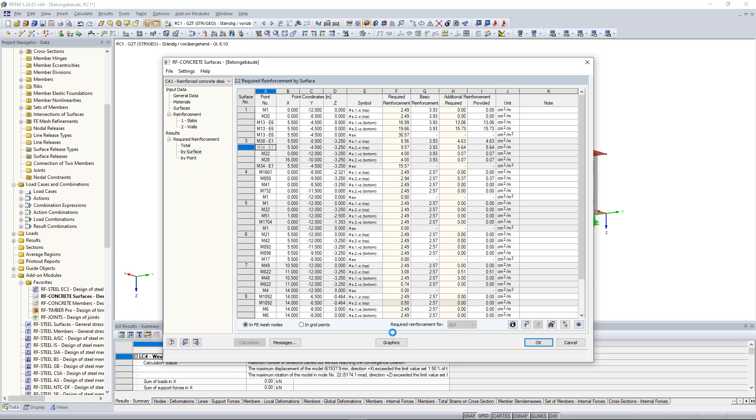So what we can see here now - first of all, here the required reinforcement, so what we have to put in our slabs, in our concrete slabs, by surface. You get an overview here, but I would recommend you to use the graphics in order to see it better.

So what we can see here now, jump to the results, click here on show reinforcement direction. And here we can see the different directions. I choose here the panel. Click here on OK.

So this is the required reinforcement - what you have to do, what you have to put there. You see this direction, the other direction, how you have to put your reinforcements.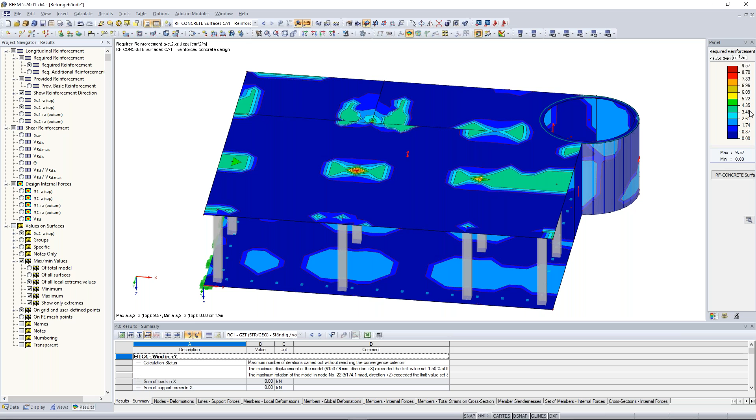When you want to have a better overview, maybe I would recommend you to change this panel and say, okay, I want to consider my rebar, then fill it up, and then you see just the reinforcement you have to put additionally to your base reinforcements, and as you can see here, especially near the columns, you have to put some additional reinforcements.

Maybe you also have to prove a punching proof here, and so on. What we can see here, also the shear reinforcements, and so on.

When you want to print something to your printout report, just select the right slab, click here on visibility by selected objects. Then I would recommend you to deactivate show hidden objects in background, view in Z direction.

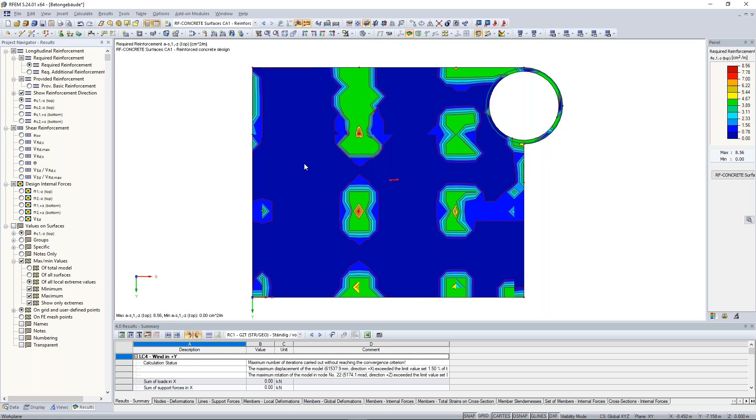So much for the design of concrete surfaces. Now let's jump to the next part, the design of beams.

So for that, I changed the visibility mode. For designing beams, girders, columns, I can use RF Concrete Members. As you know, we modeled in the last online training this downstand beam here. Important - this downstand beam was modeled as rib. So the member type was rib. When I click on that member, you see here the member type rib.

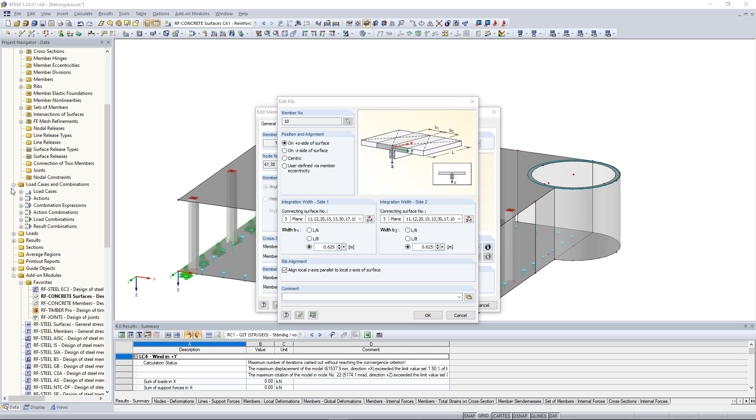And an important note here is that a rib considers this integration width, so this rib, this beam, gets additional forces from the surface. This is important to know. Good, let's design this - click here on RF Concrete Members.

Let's jump to the next part, materials. Yeah, I think that's pretty clear. Cross sections. We can also optimize here these cross sections.

Ribs. Here we can see the effective widths, also here in this bitmap. One important note: this rib is part of two members because we design here a set of members. And important when you design a set of members, you have the same effective widths. Otherwise you will get some problems, and this program will not calculate this.

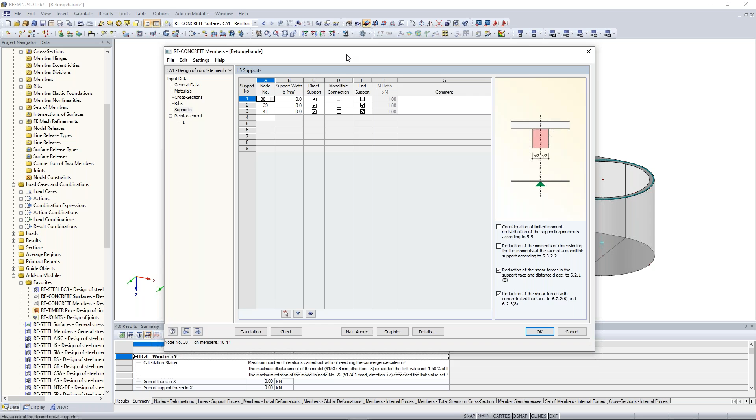So when I move this window a little bit lower, we can see this support number 38 is this wall support. It isn't an end support, but a direct support - we can do also a monolithic connection. Let's do that, and also for the other ones, we do a monolithic connection.

So we have also the possibility to consider limited moment redistribution of the support moment. I think that's known from the concrete lectures of your study, or also of the Eurocode, and also a lot of other options.

Let's jump to the reinforcement part. Here we choose the description and downstand beam, and we choose here the set of members. Okay, it's already chosen, so let's delete here these members.

Which possible diameters do I want to have for my calculation? I choose here 16 millimeters and maybe also 25 millimeters. The maximum number of layers should be 1.

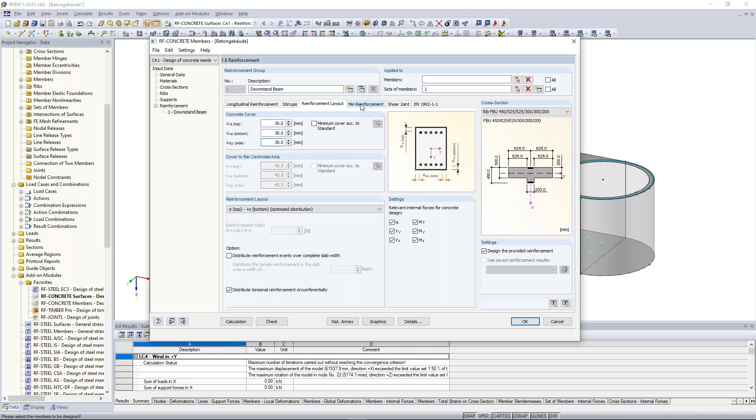Yeah, so we have just the reinforcement in that beam. Here we can also consider the concrete cover, but for this easy example, I leave it here like that, with 3 centimeters. Minimum of reinforcement, I think that's clear. Here you can adjust some additional information also, and so on.

Good. Now let's calculate that.

So this calculation will take some time. And as you can see here, the longitudinal reinforcements are listed on the top and on the bottom. Additionally, the torsional and shear reinforcements are displayed. Here you can see also some additional information about this proof, about this design of this slab.

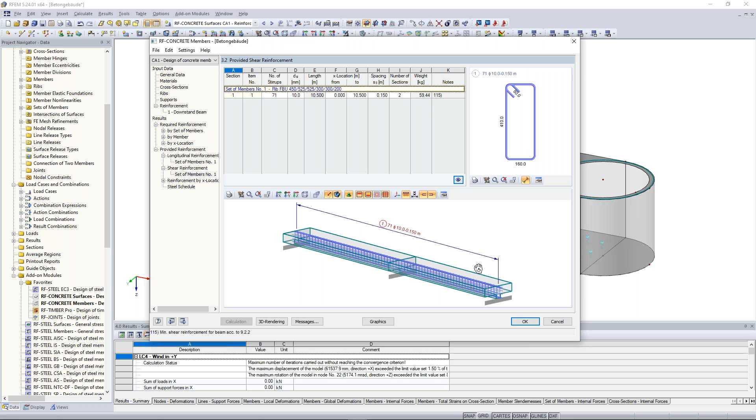Let's look at the provided reinforcement. So here we can see also a nice graphic of this structure, and also here the shear reinforcement. Also here the graphics, you can watch it also with the right effective width.

And this was a short introduction to the design of this downstand beam. Maybe one short note: here you can see the required reinforcement, and here we can activate the provided reinforcement, and you see the provided reinforcement is over this required reinforcement, and this is important.

Good. So last but not least, the design of these concrete structures, of these concrete columns. For that, go back to data, click here on RF concrete members.

Important to know is that the Eurocode 2, so the design of concrete structures, provides 3 methods for the design of columns. We have the simplified method based on nominal curvature, the general method based on nonlinear analysis including second order effects, and also the method based on nominal stiffness.

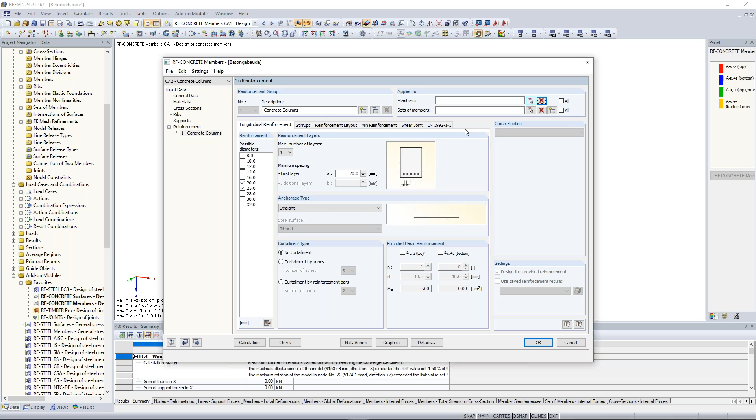And activate just the members which really include the concrete columns. So again on view, I watch the concrete columns, cross section, and I choose just these columns, draw a selection window, click OK.

And jump to the next register, stirrups. Also here I define stirrup spacing. The reinforcement layout is here in that case in corners, so I want to have my reinforcements in these corners. And then calculate this.

And here we can see it's not possible to design result combinations for nonlinear calculation. So I have to remove it and do it for the normal load combinations.

So this will take some time, and after that we can watch the results. I think I calculated too much load combinations, but I think we will have it in a few minutes.

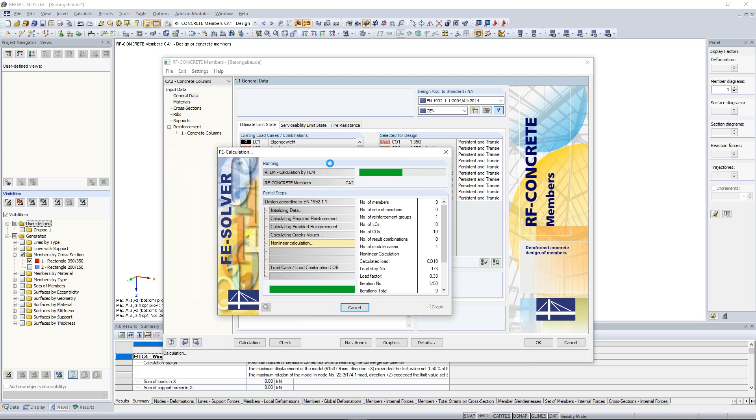Sorry for that, I have calculated too many load combinations. Normally, the load combination with the most pressure loads is the load case which will be most important to design. But now we have combination 9, so the last one will be combination 10, and after that we can watch the results.

Short hint: the nonlinear calculation will take a longer time than the normal calculation. But now I'm pretty sure we have it. If not, I'll cancel this and calculate it only for one load combination.

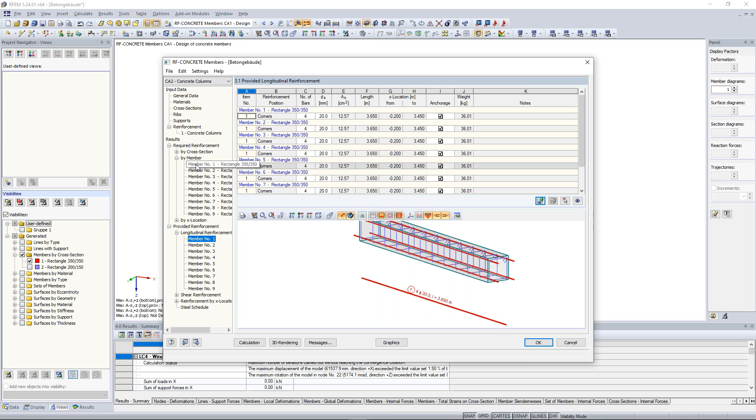And also here we can watch the reinforcements by graphic, and what we have here as provided reinforcement and as required. The required is just the minimum reinforcement. Let's look at it here. So we cancel the visibility mode. We see here the different reinforcements.

Good, so this was the last part of this training. I hope you enjoyed it and learned something. We gave you the basic knowledge of the design of easy structures in every engineering area - we had timber structures, steel structures, and concrete structures. Now I think as students you are well prepared for further steps with RFEM, especially when you do designs and so on.

Ayla, anything from your side? No, I think it's pretty clear so far. So I also hope you could learn something, especially with designing structures. And thank you for joining us. And again, if you have any questions, you can still ask them.